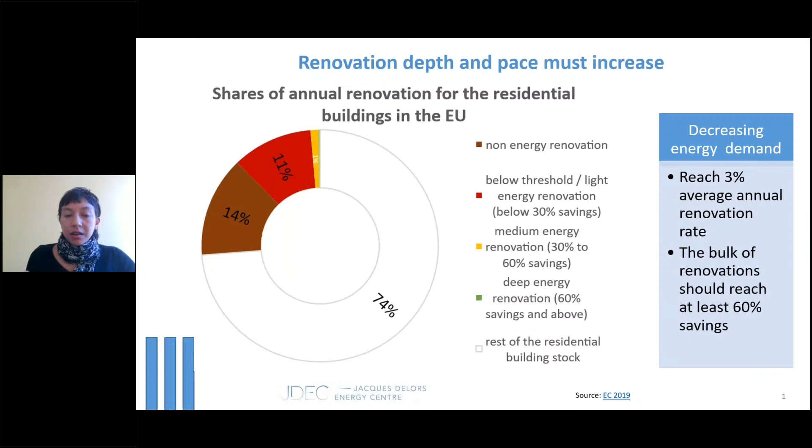What we call medium energy renovations, leading to 30 to 60% of energy savings, are actually only 1%. So you see this yellow bar. And deep renovation, leading to 60% of savings and above, is the green bar that you barely see. It's only 0.2% of the total floor renovated every year. And to achieve our climate objectives, we need to achieve during this decade, by 2030, a 3% annual deep renovation rate. So next slide.

So to conclude, both the renovation depth and rate must increase. And why do we need to increase deep renovation? It can actually lead to up to 90% of energy savings. You can see on the left, the red bars show the decrease of energy consumption over the whole retrofit steps. Why do we call it deep renovation? Because it really addresses all the building components that impact the energy consumption.

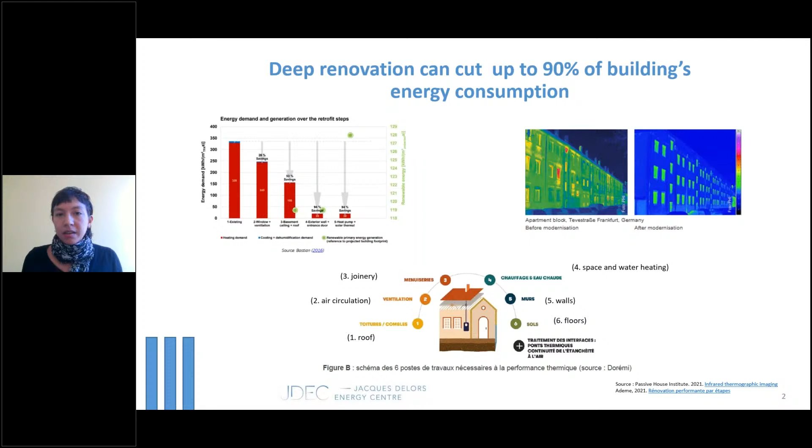And you can see around the house at the bottom of the slide all the different building elements that need to be tackled during a deep renovation. I'm talking about the roof, the air circulation system, the joinery, space and water heating, walls, as well as floors. And you need to tackle all this. So this is quite a complex multi-component operation. But in the end, you can see on the right that the infrared picture of your building is going to be completely different. So next slide, please.

So deep renovation is amazing. We know we have the skills, we have the knowledge. It's not high-tech technologies that we need to develop. It is very important, as highlighted by Serena, for our energy security, social justice, energy poverty alleviation. We are about to face a very difficult winter. So why aren't we deploying deep renovation, especially given the very high energy prices that we are seeing now?

Well, there are knowledge and awareness barriers that might be lifted slowly given the energy context. So we lack a well-communicated decarbonization trajectory and strategy, I would say. There's a lack of awareness of the benefits of deep renovations from households.

Usually people think that changing their windows is enough to insulate their home. And there's also a lack of technical support because, as I said, you need to act on all of the building's components. There's also financial barriers. So deep renovation costs about the same as a new car. And then there's access to finance.

So even wealthy households might have to contract a loan to undergo renovation and pay for renovation, but the interest rates are quite high for renovation. And for low-income households, they just can't afford to contract an additional loan.

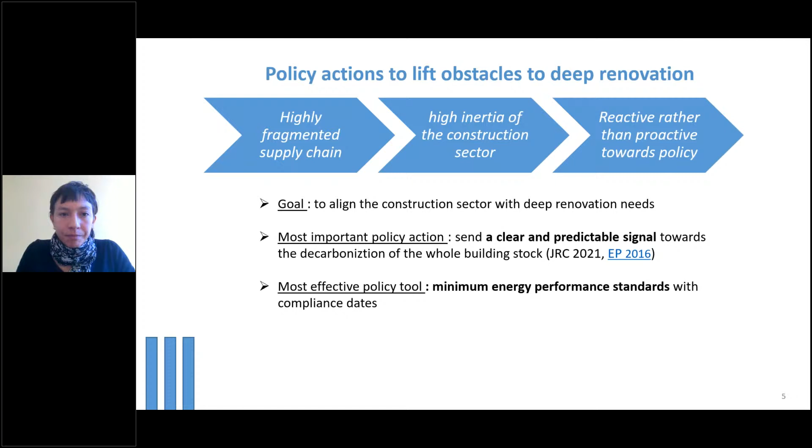And for this signaling effect and market creation effect, minimum energy performance standards with the compliance dates as proposed by the Commission in the EPBD are the way to go. Next slide. So I will go quickly over this because it's not so relevant, so I will go for the next slide. So the potential impact, and this will be my last slide, given the time.

So the potential impact of MEPS is to actually give the certainty that, for example, all buildings in the EU should reach an EPC level of D by 2030, or heat pump readiness by 2030, let's say, and then an A performance by 2050, which is the climate neutrality objective. This would actually give market certainty over the future demand.

And that would allow manufacturers of high quality insulation components to industrialize their production, local artisans to look for upskilling programs and to hire additional workers. One-stop shops could also invest into marketing and ads to reach out to new customers. And banks would also be incentivized to set up in-house expertise and invest into offering appropriate financial products.

Of course, MEPS is a very important tool. It's not the only tool that will make the renovation wave succeed, and the deployment of deep renovation actually needs a policy mix that includes MEPS that are aligned with the objective of climate neutrality, so ambitious energy performance levels and compliance dates, and it needs to be supported by stable government technical assistance, training, and funding programs.

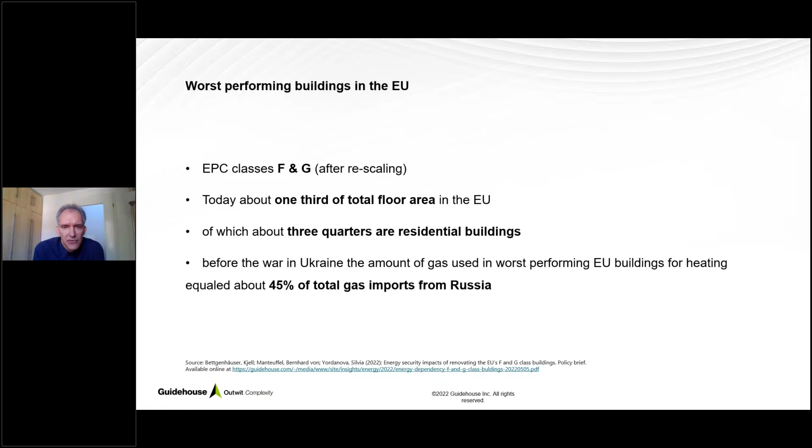Just to recap, when I talk about worst performing buildings, I mean the EPC classes F and G after the rescaling that Serena already explained. To get an idea about the order of magnitude, we talk about approximately 1/3 of the total floor area that we have today in the EU. When talking about worst performing buildings, 3/4 of this third is allocated in residential buildings. And you can see that the energy consumption in these buildings is very significant when you see that the amount of gas that is currently used in worst performing buildings for heating equaled about 45% of the total gas imports from Russia that we had before the war. Next slide, please.

A few months ago, we did an analysis of what actually can be saved, specifically with a view to gas, but also to oil, which is also imported, as you know. And first, we analyzed what can be saved by moving from the worst performing standard to the minimum standard that Serena explained, going to E, which I call here EU level MEPS. I will explain that a little bit further later. And what we see here in these charts is always the final energy that has to be purchased by the users. So not primary energy or something like that, but really what you have to pay for.

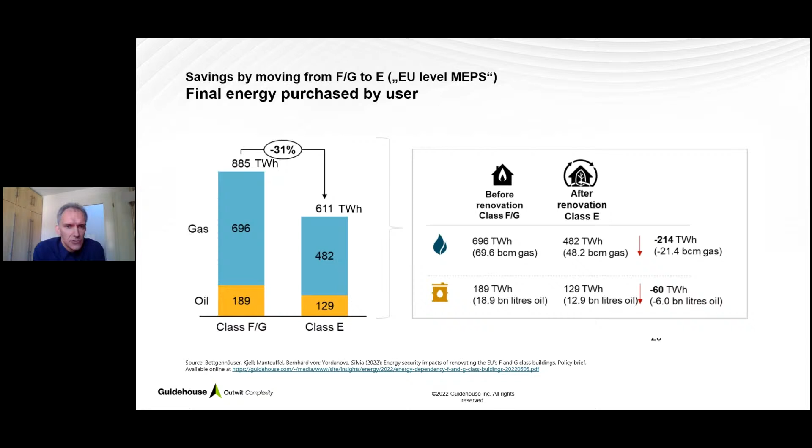Currently, we have approximately 800 or let's say 900 terawatt hours of gas and oil that are consumed in worst performing buildings. With the measures, with this minimum jump going to EPC class E, we would save approximately 30% of this energy, which is already very significant. I'm not going into the details here, but I think that's what you need to take away, that already by going to E, we could save approximately 30% of all the gas and oil that is currently used in worst performing buildings. Next slide, please.

So the next step, we were already talking about deep renovation. What could be saved if we go to deep renovation? Again, you have these 900 terawatt hours that we currently use in worst performing buildings for gas and oil. And we already heard that actually you can save up to 90% final energy when going to a deep renovation, which here we have put as approximately class B.

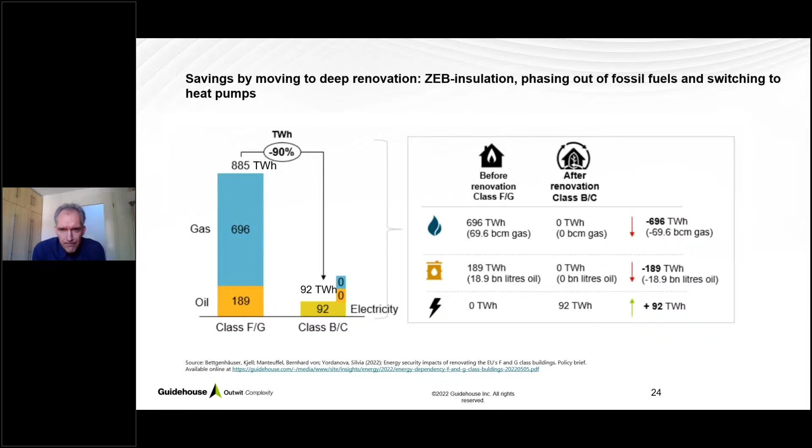So what you have to do is apply very good insulation on a zero emission building level. You completely phase out fossil fuels in these buildings and you switch to heat pumps. And that makes you get completely rid, as you can see here, of gas and oil in the buildings on site. And on the other hand, of course, you will add some electricity for the heat pumps. So that's what you see on the left. Next slide, please.

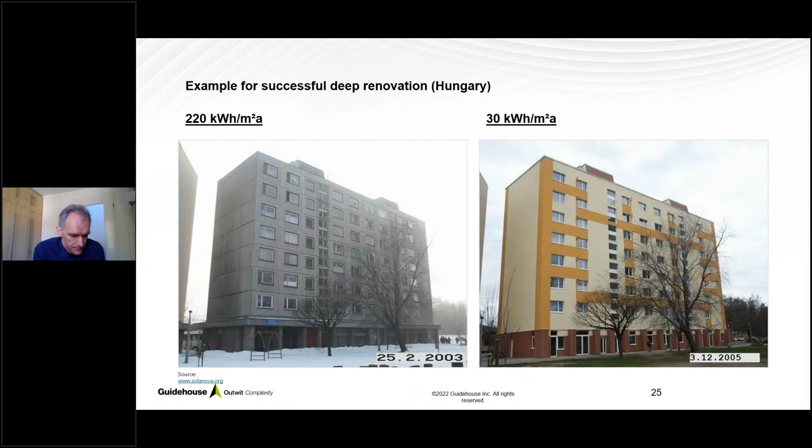Member states definitely need to go beyond Class E in their national building renovation roadmaps, which are the successors of the long-term renovation strategies, in order to really get the building stock to climate neutrality, respecting the local conditions. Ideally, you will do this going from G or F, from worst performing, to a B level, for example, to a deep renovation level, by means of a seamless renovation journey.

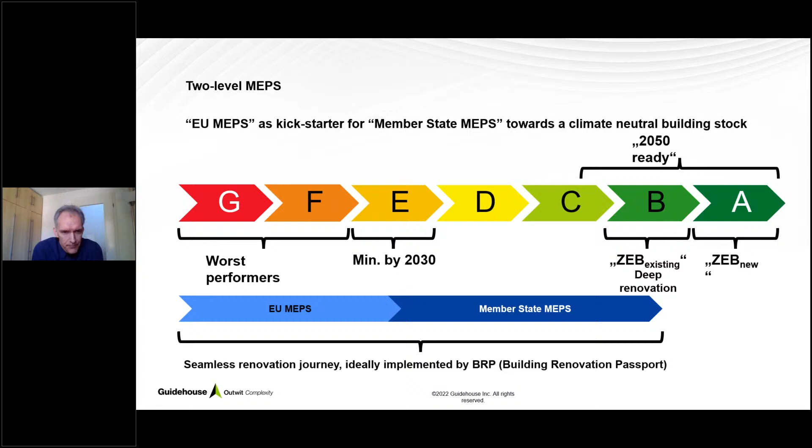So it doesn't mean that you stop at E, but of course going to E is just the first step, and then you should really continue to go to deep renovation, and ideally you should do that by using a building renovation passport that will give you all the steps from G to a deep renovation level from the start, so that it's clear also from the start that you're not going to stop after having reached E, but you go on this journey until you have reached a deep renovation level. Next slide, please.

So what does it mean for energy security? I try to make it very explicit here to say that what I just described as the EU MEPS is giving us energy security 1.0. I would say this is the first step that really drives independency from fossil fuel imports, specifically seeing the current critical context that also has been explained by Serena before. But I think what is very important is that we also look into the future, because today we are very much talking about independency from fossil fuel imports, of course.

But energy security 2.0 will mean that we in Europe also will need independency from renewable energy imports in order to avoid a similar situation that we are facing today. And this only can be achieved if member states really consequently continue the path that the Commission has put with the MEPS level until E, if member states really continue this MEPS journey towards deep renovation. Because deep renovation, and that's the final aspect I would like to highlight, is, so to say, the incorporation of the energy efficiency first principle. It will safeguard a persistent energy security, so not just getting rid of fossil fuels, but also looking further into the future to get independent from renewable energy imports.

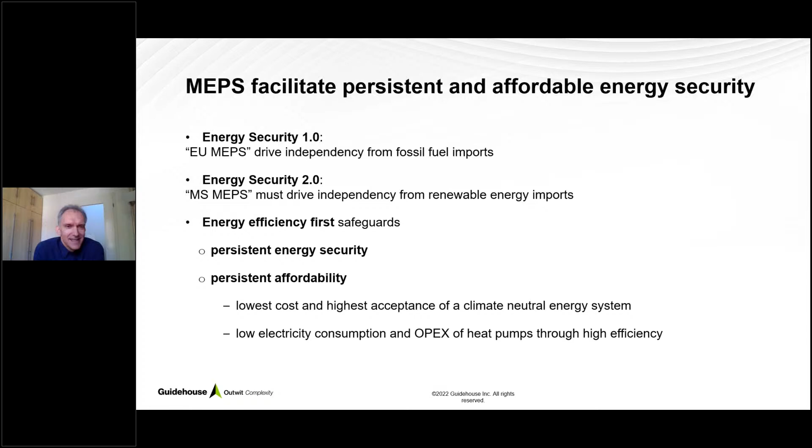Yes, thanks, Andreas, for opening up towards this very important dimension of what MEPS can deliver. I like how you describe looking into the future, the EU approach and what can be done at EU level and what should also be complemented at member state level with a systemic dimension. It's about energy independence, but it's also about protecting ourselves from energy price vulnerability. So I would say it's a tool for independence and freedom.

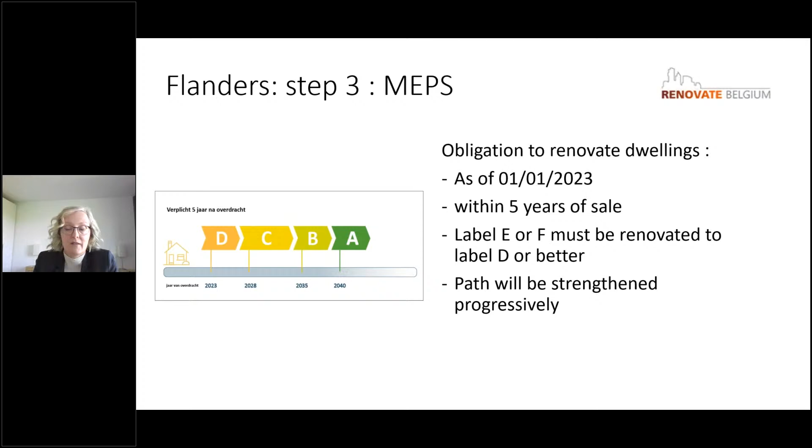Flanders has been investing quite some effort in the development of energy performance certificates and also into a digital tool gathering all the information about building, which is called the Woningpas. And it is already announced right now that the path will be strengthened progressively. So it looks very good. We are there. We have introduced MEPS as of next year in Flanders. Are there perhaps some caveats we should introduce? And this will be my last 2 slides.

On the question of financing renovation, I would like to draw your attention to a study that was led 2 years ago in Belgium by the Federation Agoria. They asked a university professor to analyze the financing capabilities of Belgian people to renovate their property. And it turns out that 40 to 51% of owners are not able to finance climate renovation. And here you can say, well, it's really bad news. But you could also see it the other way around and think that half of the owners are able to finance their renovations. So I don't know if it is really bad news or good news. Well, it's a fact.

And for these people who are not able to finance their renovation, even if you offer limited subsidies, it will make no difference because they would need 50,000 euros or more. We can also see in the study that climate renovations are not a priority for homeowners. Their priorities are comfort, utilization of the building, or resale value. Well, this was of course done 2 years ago, so the motivations might change now that energy has become so expensive. But still, at the time, you would see people preferring to invest in a new kitchen than in energy measures. The study also highlighted that a huge majority of renovations were phased renovations.

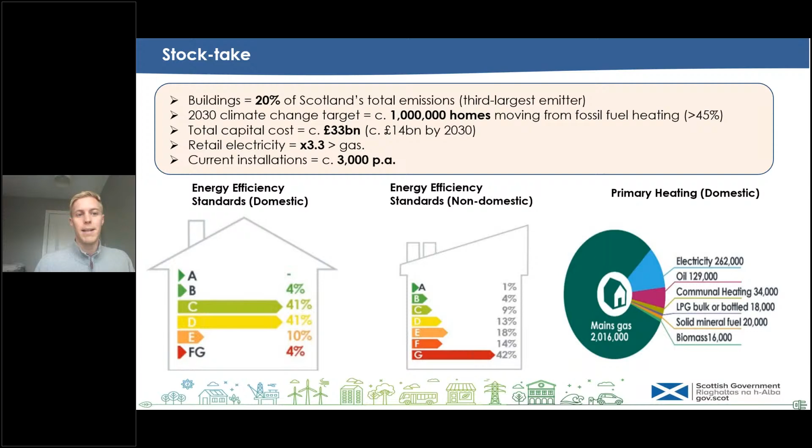But as you can see in the far right column there, in terms of heating systems, the scale of the challenge is even greater. We've got something like 2.2 million homes to decarbonise by 2045. And there in the middle, you can see in the non-domestic sector, although we only have around 200,000 non-domestic buildings in Scotland, the energy performance of those at the moment is generally quite poor. We need to increase that substantially as well over this next period in time. So can we jump on to the next slide, please?

So not to dwell on the challenges, what I would like to really get into is how we're planning to address this in Scotland. So at the minute, we've got some building blocks here in Scotland. We have quite comprehensive domestic and non-domestic advice services, which signpost and help consumers to access our loans and grant schemes that we have or are about to have here in Scotland. We have dedicated fuel poverty programmes that are run by local authorities in specific areas, as well as a national scheme that more discrete households in fuel poverty can access.

And we have various pieces of legislation that are helping us to plan the transition from gas network connections towards other forms of decarbonised heat. So we're hopefully not starting from ground zero in Scotland, but we did recognise that to achieve these overarching targets, we needed to refresh our overall strategy and approach. So last year in October, we launched our Heat in Buildings Strategy, which committed over 100 actions that we're going to take as a government to achieve the targets.

And just pulling out some of the highlights, it's commitments to levels of investment during the term of Parliament that we've never quite reached before in Scotland. This is fairly groundbreaking investment that we're going to make over the next period in time. Also engaging with the public really quite meaningfully over the next wee while, in the early part of this decade, in order that we're laying the groundwork that people will be more accepting and more aware of the issues of continued use of fossil fuel heating, as well as launching a new public energy agency to coordinate and streamline the programmes that we do have to deliver energy efficiency and heating system replacements.

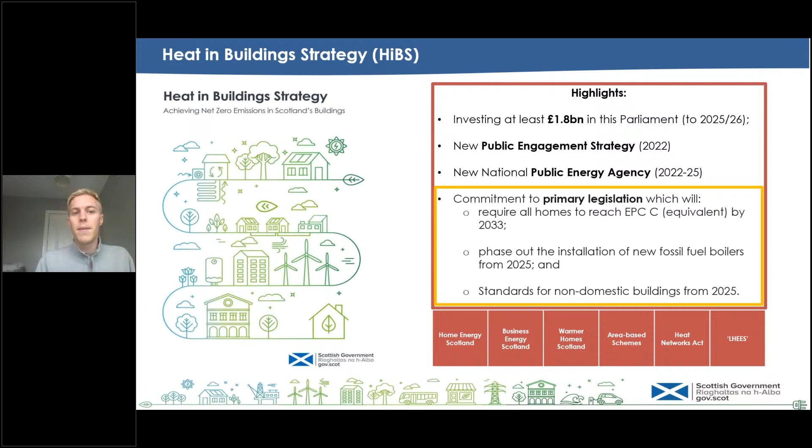But I think the part that would be good to speak to you about this morning is our commitment to primary legislation. So a new bill in this Parliament that is going to require all homes to reach a minimum of EPC C or the equivalent thereof by 2033, to phase out the installation of new fossil fuel boilers starting in 2025, as well as standards for non-domestic buildings. So I'll go into a little bit of detail about that just now before handing over for questions. So could we jump over to the next slide, please?

So this is just a quick overview of the timescales that we're working to. There's been a lot of talk about MEPS this morning. We've been terming this a Heat in Buildings standard, or a HIB standard, here in Scotland, and essentially it has two elements. The first is a requirement to meet a minimum energy efficiency standard by 2033, and the second would be a prohibition on the continued use of direct emissions heating systems after 2045. And what we mean by direct emissions heating systems are those that produce emissions when combustion takes place within the curtilage of the building. So essentially gas or oil or LPG boilers, those sorts of things.

And we can see here in the timeline that those standards will start to take effect from 2025, and certainly in existing homes and in the new build sector, that standard will start to take effect ahead of time in 2024, with legal backstop dates that people have to meet in the years 2033 and 2045.

I think we're about to see a little pop-up. Yep, there we go.

And what we're trying to show here is that in the intervening periods between 2025 and 2033, and 2025 and 2045, we need to make progress so that we avoid bottlenecks at those backstop years, but also so that we make the progress that we need to make in terms of the overall emissions reductions targets, and that it's a fairly consistent annual installation rate that we see.

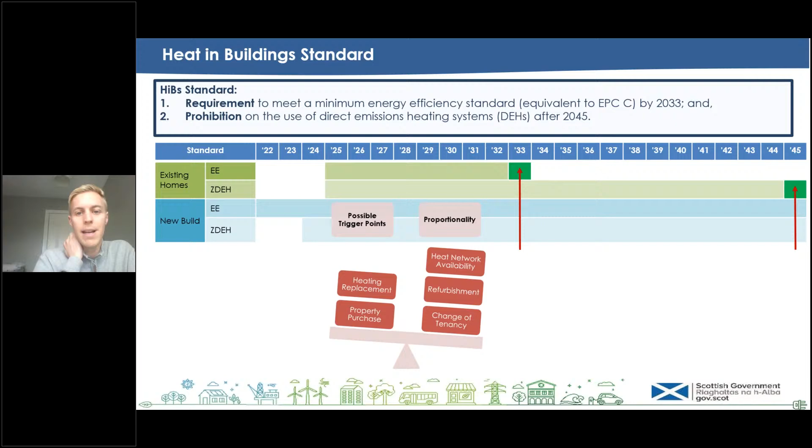But essentially, we know that we need to take action at an appropriate point or points in time between the years 2025 and 2033 and 2045. So if we could move on to the next slide. The standard itself, as I say, is made up of two elements.

The minimum energy efficiency standard, to delve into that a little bit more, will essentially be a maximum space and hot water heating requirement that will be specified in kilowatt hours per metre squared per year. And that will essentially be defined in terms of what is the maximum level that is needed to be able to enable a low temperature heat pump in a home, but also to make sure that it isn't diluting the ambition that both we as a government and the wider Scottish Parliament have had around the need to reach a minimum of EPC C. So that'll be the overarching energy efficiency standard.

But what we would also like to do is to specify to the public that they can meet that standard through the installation of a very specific list of measures. So as an indication, those measures might be loft insulation, cavity wall insulation, suspended floor insulation, those things that you can see listed there.

And the rationale for wanting to do that is that we can quite simply communicate to people what exactly we need them to do, rather than needing to undertake what can sometimes be quite an intensive assessment of the performance of the home, but also that the supply chain knows exactly the measures that are going to be demanded by the public, so that they can start to mobilise in this decade and start to deliver on some of the logistical and scaling challenges that we have.

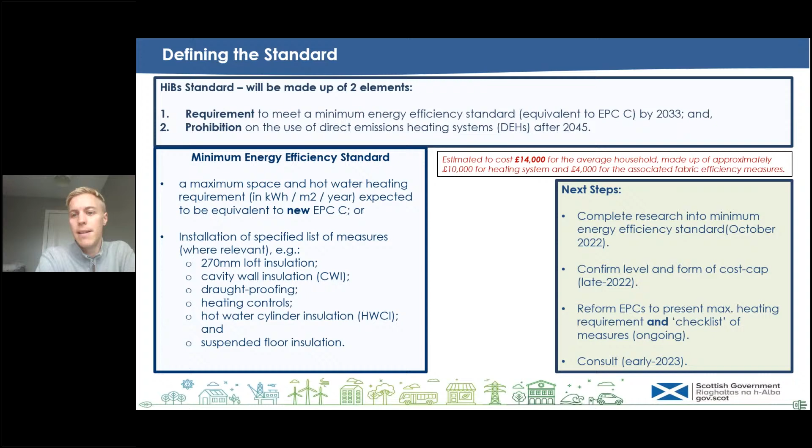And alongside that, we will want to reform the energy performance certificates so that they can start to act as, I guess, a checklist of where homes are in relation to the minimum energy efficiency standard. So when they're sold, for example, the incoming purchaser can take account of the building's performance and the potential liability that they might be taking on. So could we pop over to the next slide, please, and I'll try to wrap up.

This is quite wordy, so apologies, but this is really about our plans to reform the EPCs themselves. I don't think we need to dwell on this one. It's going into a little bit more detail about our plans to reform EPCs and to draw out the essential information that consumers will need to know, as well as trying to sideline the perverse incentives that we sometimes see through the recommendations from EPCs, so that homeowners understand what they're going to be legally obliged to do, and where they can find help, support and advice on how to meet those standards.

So I think that's me.

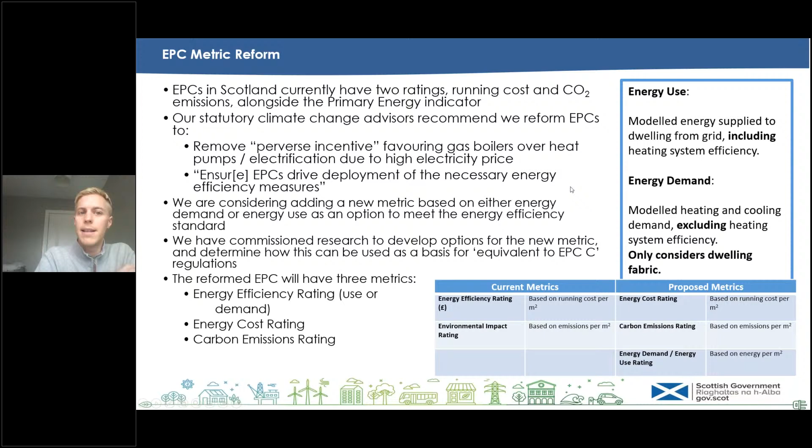Thank you, James. Wow, it's very rich and complete. I'm very impressed by the approach that you've been taking: the interaction between heating decarbonization and efficiency of the building envelope, and also how you've been engaging with the stakeholders. So good luck for the consultation and the next steps. I'm sure this is going to inspire other partners.